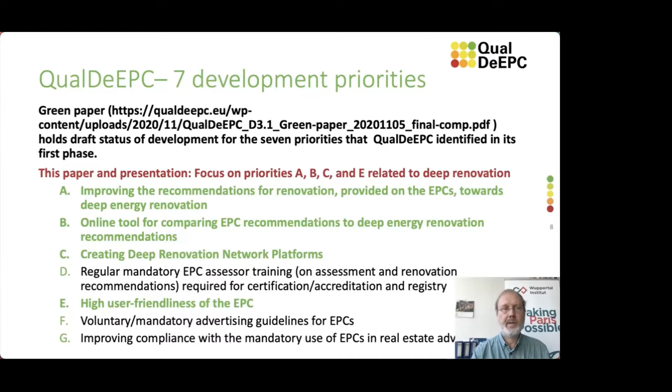In this green paper, we summarized the current situation in the partner countries for each of the 7 priorities, collected best practice examples, and then developed a proposal for each topic, which can be either a policy proposal or a tool or combining both. So these policy proposals are general proposals that could be adopted in any country in the EU. And some details may not be feasible in specific countries, or they may already exist. And so the next work package will develop the country-specific adaptations for the 7 countries included in our project.

So let me start with priority A, the recommendations for renovation. We found that currently the recommendations that are provided on the EPCs are usually oriented towards minimum legal requirements and often only include low-cost measures. So if, for instance, the renovation of the facade or the roof is not deemed cost-effective by the assessor, he or she may not recommend this at all. So we think this is also maybe a misinterpretation of cost-effective or cost-optimal.

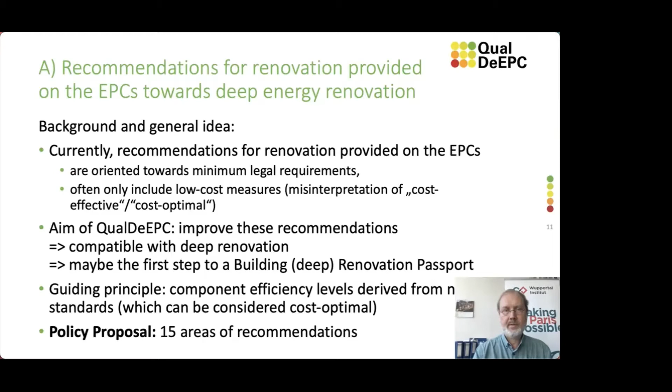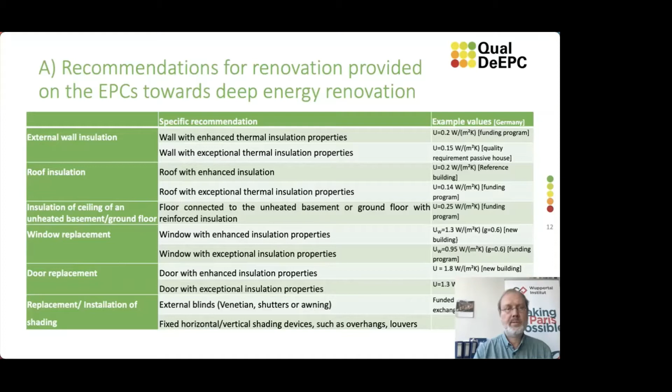And so we developed a policy proposal with 15 areas of recommendations. You can find them in the paper. They are concerning, of course, the building shell, with often 2 levels, good and very good insulation properties. Then they are concerning the heating, ventilation and air conditioning systems. And finally, several special aspects.

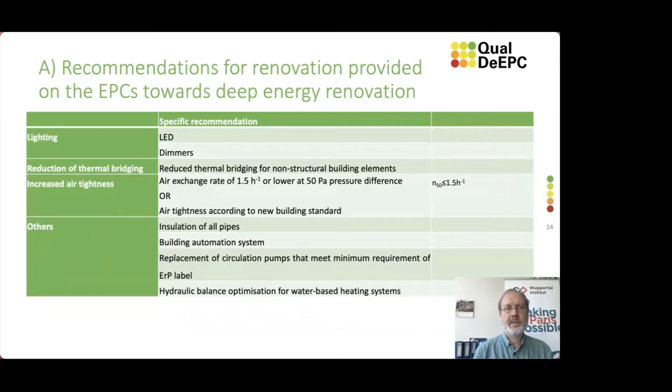The second priority is a tool, an online tool for obtaining first recommendations on deep energy renovation. It's based on an existing home energy check tool from Greece. There are several similar tools in many countries, but not in all countries already existing.

And the aim is to have a user-friendly user interface for building owners that allows them to understand which recommendations could be interesting for their building, so to discuss them with the EPC assessor. Or if they already have an EPC with maybe only a few recommendations, to get a second opinion: are these good or what else could be done?

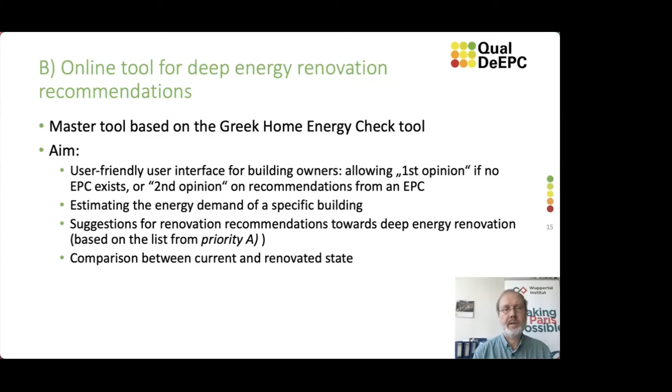And based on some inputs for the building, this tool will allow to estimate the current energy efficiency, to select renovation options, or it will provide some recommendations to the user, and it will calculate an estimate for the energy efficiency and savings in case of renovation. But of course, this is only a first impression of what could be cost effective and could be done. So the tool will in any case recommend to obtain an energy audit to validate the energy demand and these recommendations.

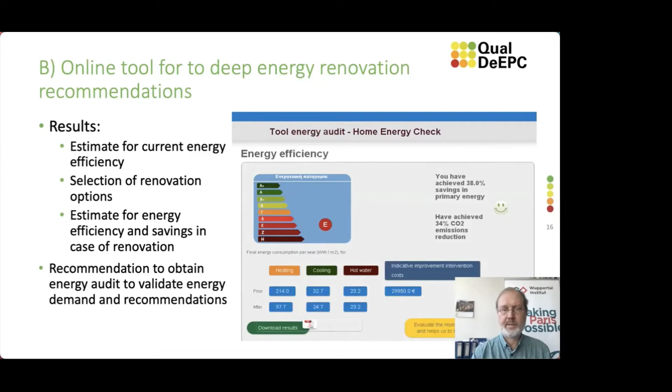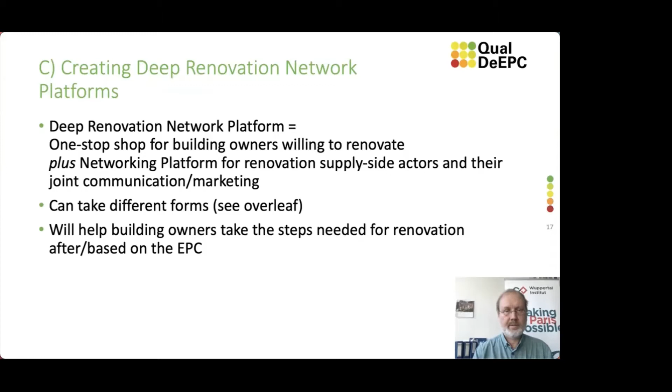Then the tool will also be linked and included into what we call deep renovation network platforms, which is another tool. It is meant to be the concept of a one-stop shop, which is often discussed these days and tested for building owners willing to renovate, plus also a networking platform for the supply side actors in the renovation business, for joint communication and marketing, or also for training these supply side actors. It can take different forms, and it will help building owners to take the steps needed for renovation after they have an EPC, and best also based on the information in the EPC.

So these deep renovation network platforms can either be an online platform or a local or regional physical hub, or also a combination of both. And they can provide information only, or they can guide and coach the building owner through the implementation, or they can even help organize the implementation itself, including the finance, for example. We've defined a basic version, which is an online information platform, whereas the extended versions can be all other types.

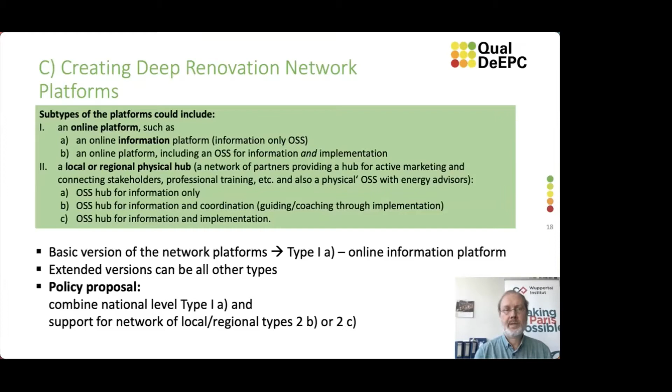And we've also prepared a policy proposal, which is for national governments to combine an online information platform at the national level, and financial and technical support for a network of local or regional physical hubs that also offer guidance or coaching, or even support with the actual implementation.

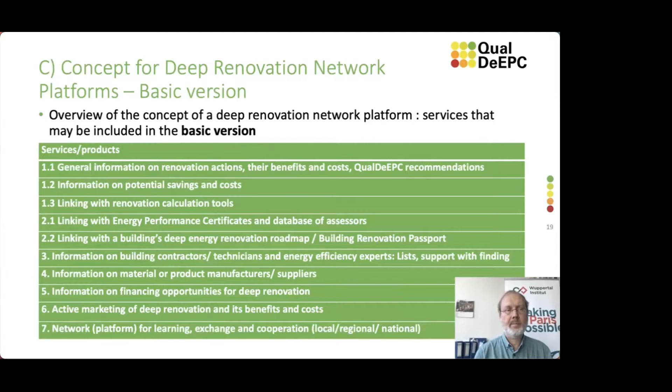The basic version, as I said, is mostly information on renovation actions, their benefits and costs, the link to the renovation calculation tool, and of course to energy performance certificates in explaining these. Also possibly with a building renovation passport, support with finding contractors or materials, information on financing opportunities, but also for the supply side actors, active marketing of deep renovation, and a networking platform for them for learning, exchange, and cooperation.

The extended version could also include capacity building and training, or the step-by-step guidance and coaching for renovation projects, monitoring the implementation of renovation projects, operating a physical network hub and information center, maybe carrying out renovation projects on behalf of the building owners, maybe initiating and coordinating demonstration projects, or aggregation of building renovation projects.

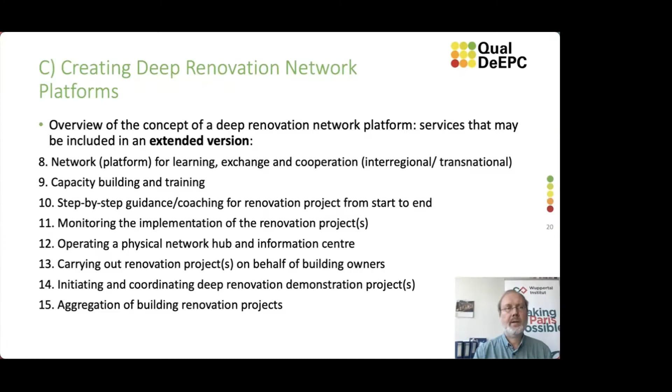Then finally, the high user friendliness of the EPC, which concerns the EPC form or template itself. And our objective is to make these EPCs more useful as a first step towards deep energy renovation, but also for the buying and rental market of buildings, of course, which is the second objective of EPCs. We found that in many countries, the EPC forms implement the basic EPBD requirements, but asked ourselves, is this what building owners or potential buyers and tenants need?

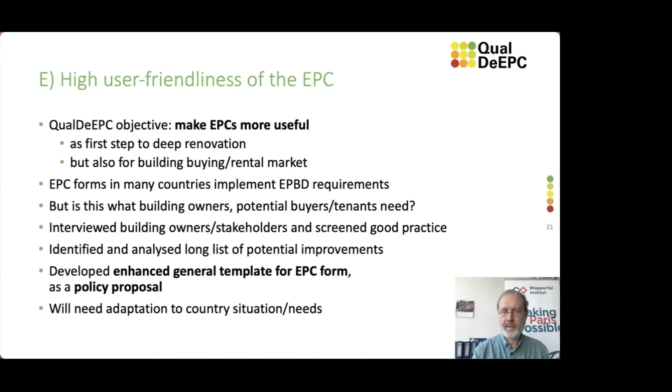So we interviewed building owners and stakeholders and screened good practice, and identified and analyzed a long list of potential improvements, and then developed an enhanced general template for the EPC form as a policy proposal, which has a standard design of 4 pages, room for adjustments according to national requirements, of course has the basic building data, but then not only the current energy classification and data required by the EPBD, but also, as you see on the right column, a new classification and energy performance.

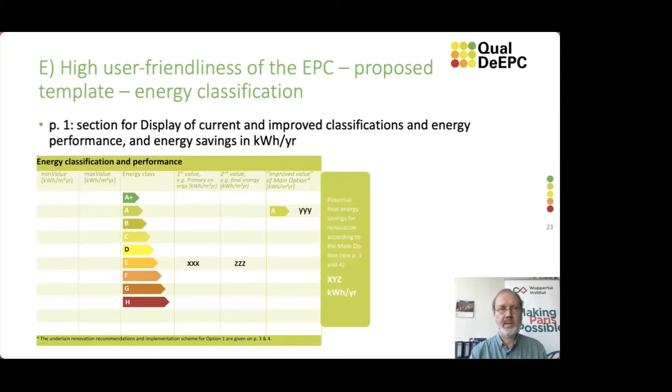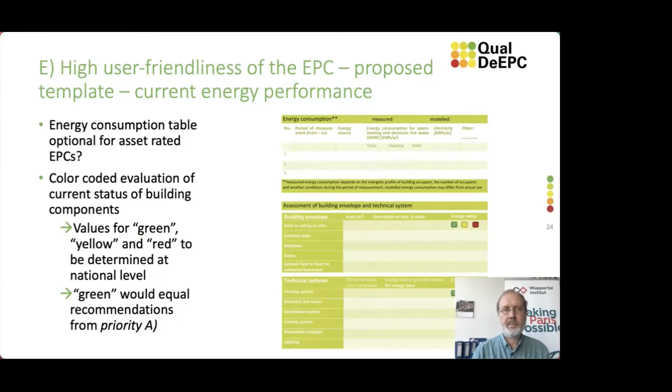And in addition, not only per square meter, but also for the whole building or dwelling in kilowatt hours per year, the savings that can be made, because this is more informative for users. Then we also have a scheme of classifying with a traffic light scheme the current efficiency of the building components and also of the recommendations, which of course should then be green and be based on our priority A, our improved recommendations. And the assessor can select a combination as the main option for which the savings will be given on page 1.

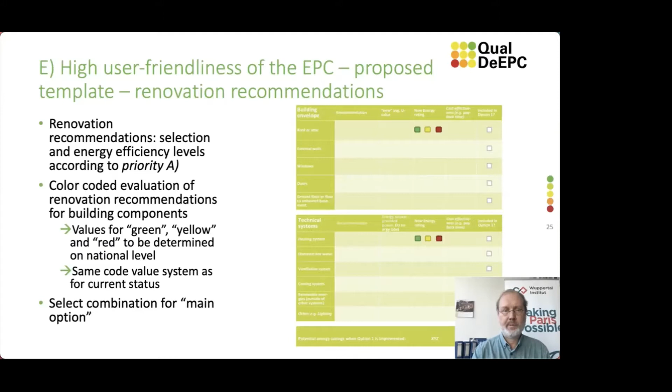And the fourth page also has a description of useful combinations and a stepwise implementation of the recommendations of the main option to be a first step towards a building renovation passport, and a link in the future to a deep renovation network platform at national scale.

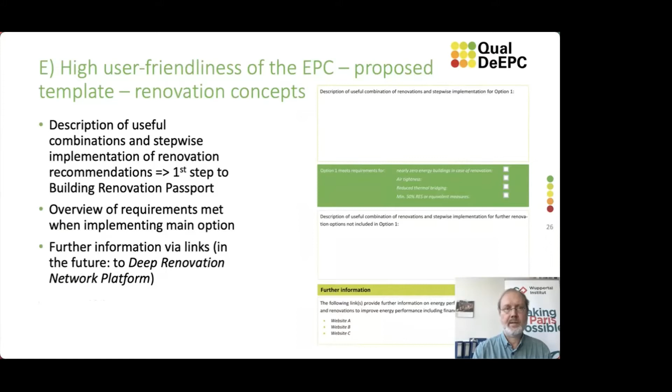We had a second round of national workshops and an EU workshop, which mostly welcomed these draft proposals and tools, but also gave us some suggestions for improvement. For instance, that we need to guide better on when to recommend which action on the EPCs, based on whether renovation is planned anyway, or what is cost effective using incentive programs. And also not only include energy data, but also CO2 emissions and potential CO2 and possibly cost savings on the template. We are currently testing the template in around 100 buildings, including non-residential. And this also confirmed the findings.

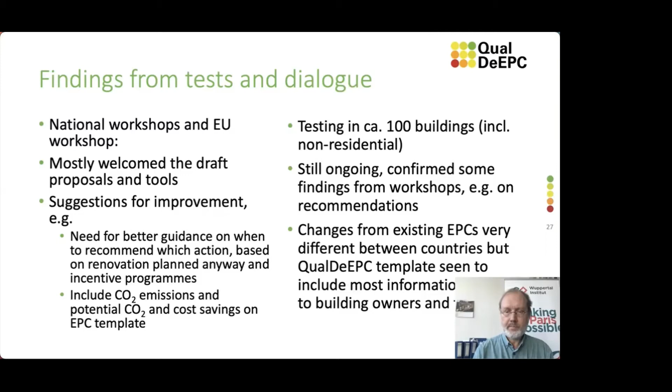So discussing, we find that EPCs in their recommendations do have potential for deep energy renovation if they are consistent with deep energy renovation standards, are provided in a user-friendly way, and connected to further energy advice and financial and technical support. It would be better to require building renovation passports, but when will they be introduced? EPCs could be the first step towards it. The white paper will update the proposals and concepts, and then we will adapt to the national situation and develop further products. Thank you for your attention.

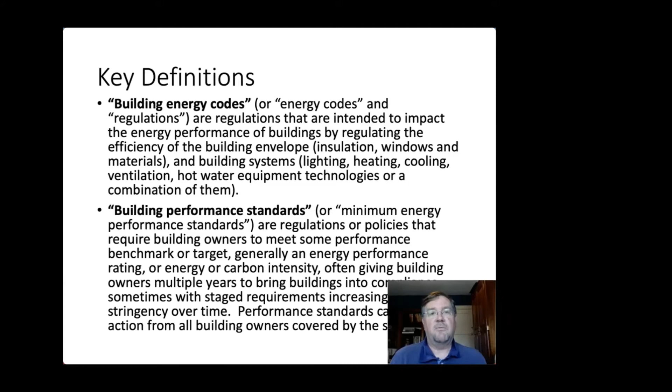I'm going to show several tables now that are extracted directly from the paper. Some of these have a lot of words on that I'm not going to try to get into in much detail, but wanted to let you know the kind of information that is included in the paper. This is a summary of some building performance standards in a number of the leading jurisdictions.

And when our paper was going through the peer review process, the reviewers suggested that because building performance standards are a newer type of policy, that we include some summary of the requirements and the types of performance requirements that are in place in some of the leading jurisdictions. You'll see more on this in the paper, and then you'll also see several references that have much more detail in the paper as well.

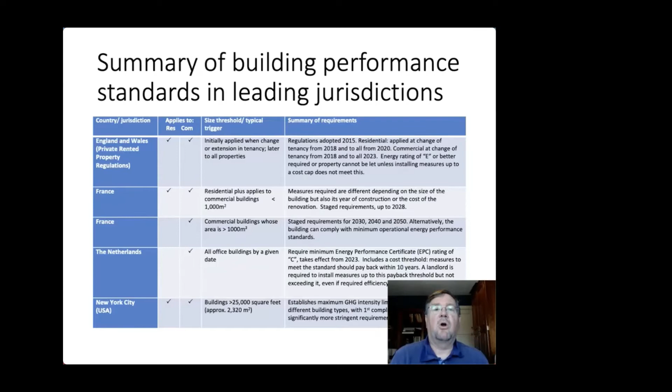But I think, as you see here, they apply to different types of buildings. There's often a size threshold, but not always. And then you can see there are also stage requirements that will take place and change over time, often tied to some sort of energy performance certificate or rating level. But in the case of New York City and also Tokyo, which is described in the paper, it's a maximum greenhouse gas or carbon intensity for the building.

Next, what are kind of the basis of the requirements and how do they differ? As I'd said before, energy codes are generally developed for new construction, though then some of those new construction requirements are applied to substantial renovation or alteration projects to existing buildings, whereas performance standards are based on some sort of threshold of building energy or carbon performance, generally, as I said, with a performance rating or some sort of energy or carbon intensity.

The big difference, and part of why there's so much interest in performance standards now, is this trigger for requirement, that a code generally only applies for an existing building when you're doing some sort of significant renovation, refurbishment, or remodeling of an existing building. And often then that renovation needs to be exceeding a certain portion of the building floor area or value. So there aren't as many times when that would be triggered.

A performance standard is generally applied more widely to a wide set of buildings, perhaps on change of ownership or tenancy, but then you need to, at some point, either by a date or by that change in ownership or tenancy, bring the performance up to some prescribed level that again can change over time.

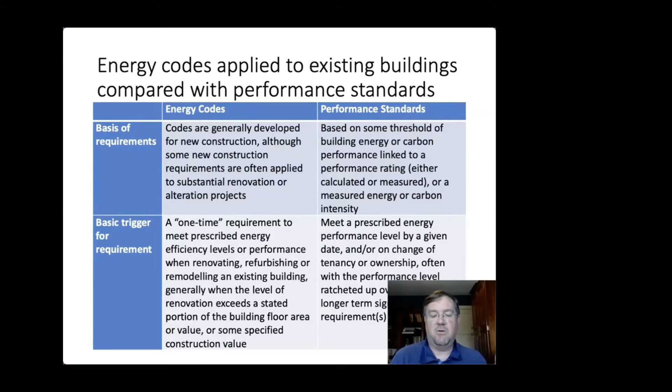What are some of the main differences? And I think, as I alluded to before, with energy codes, with building renovation as the trigger, only a small percentage, generally in any given year, face those types of requirements. So we're only hitting a pretty small fraction of the existing building market in any given economy or jurisdiction, whereas performance standards really get into potentially a much broader set of buildings.

But that comes with issues. A big one of the implementation issues is that with this new type of regulation, many potentially regulated buildings would not be otherwise subject to ongoing maintenance or other building requirements after having met some sort of initial occupancy certificate. So there are some implementation issues involved. Some of the other pieces, and again, we have more detail about this in the paper, in terms of enforcement and compliance, in many cases for a code, the building control officials may not be notified.

It may or may not actually, even if the building is kind of by regulation or by law required, in actual implementation or practice, the compliance may not be enforced as directly.

One of the pieces that is an issue with performance standards and why sometimes they're phased in with certain building types or building sizes early on is that this can require a lot of new capacity, not only for regulators, but for building rating systems, building rating professionals, as well as the various contractors and building energy trades that are required to make the upgrades that will bring a building up to the performance level.

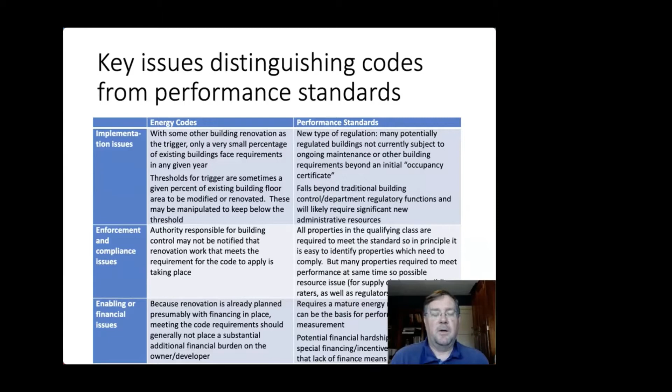Really, I think when we tried to summarize a lot of what we learned through this process, and again, this is an ongoing project to support the IEA Building Energy Codes Working Group, a few key pieces that we saw are, in terms of benefits, energy codes are widely understood in most of the OECD and even some emerging economy countries, though much more with application to new construction, not necessarily for existing buildings. In terms of enforcement, we find that sometimes energy codes are not the highest priority, that health and life safety issues take a higher priority.

Performance standards, I think the main benefit, as I've already said, is there is a way of triggering major energy improvement activity without other construction such as remodeling or renovation being the trigger. And part of this then is it should definitely drive much more significant volume of building energy improvement in the existing building stock. And the other major benefit that we see is this longer term glide path with staged changes and signals about requirements coming several years into the future that can be considered to have a pathway, maybe through some sort of roadmap or building passport that can allow building owners to do capital planning to get toward longer term improvements and meeting the deeper targets.

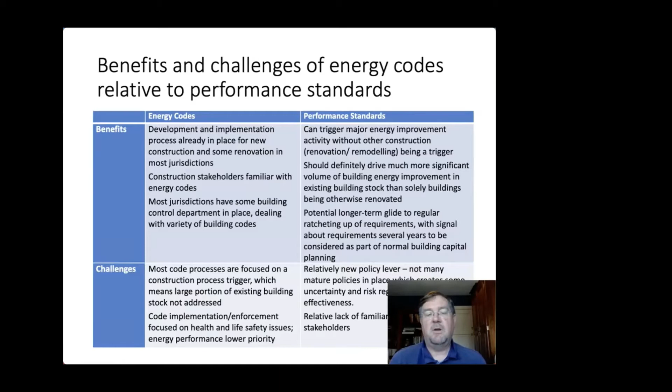The one negative, I would say, is it's a relatively new policy lever. There are not many mature policies in place. A lot of them are just taking effect now. So there's a ways to go before we will know what the real impacts are. And there can be a relative lack of familiarity by many industry stakeholders. And that kind of came through even through the review of this paper.

Our conclusions, again, this is somewhat repeating what I had in the previous table, but energy codes are a very mature regulatory policy in wide use. I will say there's significant variation we've found among different countries and even within countries. And in the full report that's forthcoming, we will also have some more detailed information about the triggers and thresholds that are applied within different states and localities in Australia when there's the same model national code in place.

Performance standards, again, somewhat repeating, but it's a newer policy tool without longer-term, widely evaluated experience, but potentially driving much more energy performance improvement in much larger numbers of buildings. These two policy types can be applied differently, or in some of the jurisdictions, they are being applied together to achieve significant savings in the very large existing building stock, and we see a lot of potential for that to improve and increase in the future.

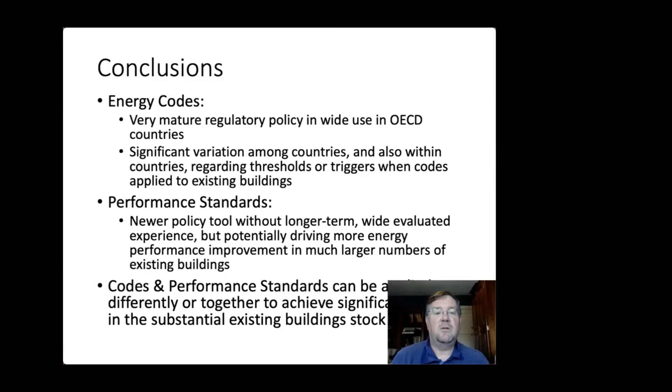Move on to questions now. I will briefly say that most of you probably know that there is currently an open consultation from the European Commission on potential changes to the Energy Performance of Buildings Directive, and there are some specific questions that the Commission staff have asked regarding minimum performance standards for existing buildings. I encourage you to read our paper and ideally to submit some comments to the Commission as well.

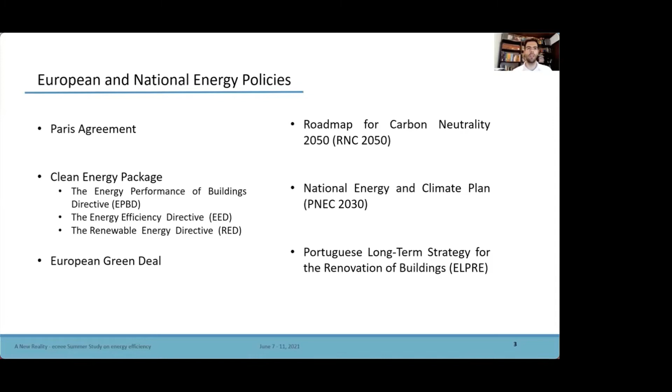About energy policies at the European level. In 2016, the Portuguese government committed to ensure the neutrality of its emissions by the end of 2050. The Clean Energy Package, a set of legislative actions on the energy performance of buildings, energy efficiency, and renewable energy. The European Green Deal, a set of initiatives aimed to make Europe climate neutral in 2050. At the national level, the Roadmap for Carbon Neutrality 2050, a long-term strategy for carbon neutrality of the Portuguese economy. The National Energy and Climate Plan 2030, and the long-term strategy for the renovation of the buildings.

The National Energy and Climate Plan sets the following energy and climate goals for 2030. Reduce greenhouse gas emissions by a minimum of 45%. Reduce primary energy consumption by 35%. Ensure 47% of renewable sources in gross final energy consumption. Ensure 20% of renewable sources in the transport sector, and achieve a target of 15% electricity interconnections capacity.

The Portuguese long-term strategy for the renovation of the buildings establishes the indicative objectives for the horizon of the decades 2030, 2040, and 2050. The indicative objectives are the following: renovated building area in the proportion of 363 million square meters for 2030, 635 million square meters for 2040, 747 million square meters for 2050.

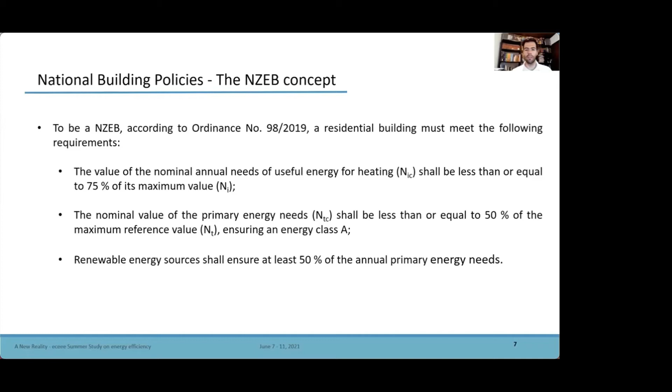To be an NZEB, according to Ordinance number 98/2019, a residential building must meet the following requirements. The value of the nominal annual needs of useful energy for heating shall be less than or equal to 75% of its maximum value. The nominal value of the primary energy needs shall be less than or equal to 50% of the maximum reference value, ensuring an energy class A. And renewable energy sources shall ensure at least 50% of the annual primary energy needs.

Regarding the state of the art of buildings in Portugal, the building sector is responsible for about 30% of energy consumption in Portugal. In 2019, about 5.97 million existing housing units contributed to energy consumption and to greenhouse gas emissions. Since the implementation of the energy certification system, around 1.4 million energy certificates have been issued, of which around 1.2 million are for residential buildings.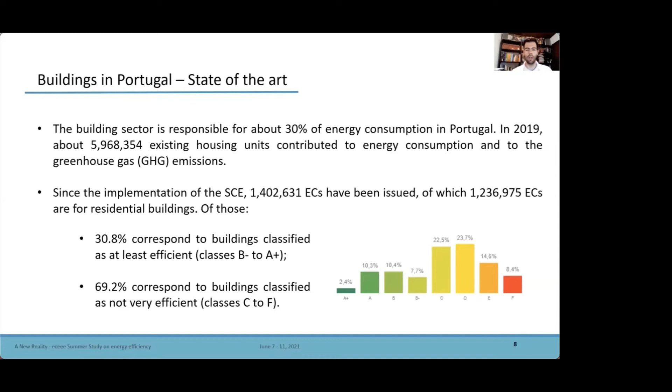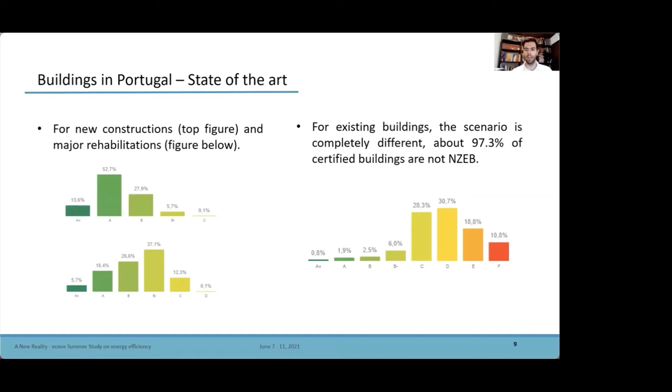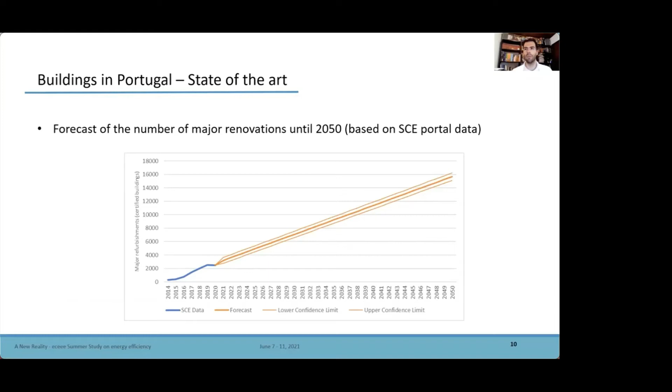About funding and support programs. The plan to promote efficiency in the consumption of energy aims to promote measures to improve efficiency in electricity consumption. According to the evaluation criteria of the measures of PPEC 2017 and 2018 edition, the residential segment presented higher values for the cost-benefit ratio in all aspects of evaluation, from the point of view of the plan, the consumer, and social, revealing that the energy efficiency measures implemented in the residential sector are extremely beneficial to the electricity sector, to the consumer, and to the environment.

Despite that, only around 3 million euros of the total available budget of 23 million euros was allocated to the residential segment. The program in support of more sustainable buildings aims to finance measures that promote rehabilitation, decarbonization, energy efficiency, water efficiency, and circular economy in buildings, aiming occupied residential buildings built prior to 2006.

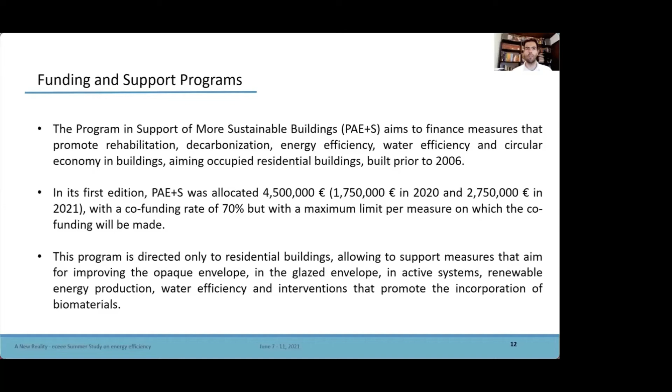The Recovery and Resilience Plan is a national application of the Portugal 2030 strategy and is based on three structuring dimensions: resilience, climate transition, and digital transition. Based on the climate transition theme, 620 million euros of investments are planned to promote energy efficiency in buildings. These investments will be divided into 300 million euros in energy efficiency in residential buildings, 250 million euros in energy efficiency in central public administration buildings, and 70 million euros in energy efficiency in service buildings. The Recovery and Resilience Plan should leverage the implementation of the long-term strategy for the renovation of the buildings in Portugal.

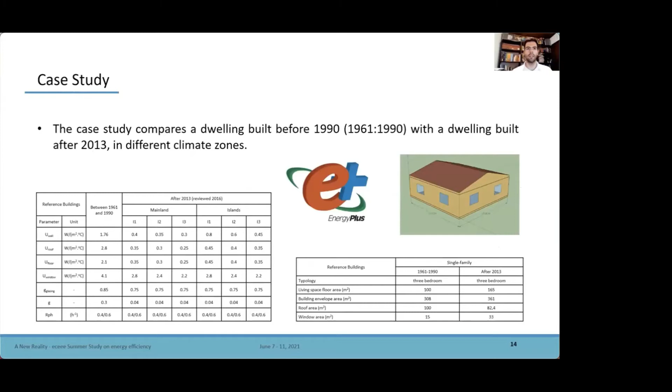Moving to the case study on energy performance of buildings. The case study compares a dwelling built before 1990 with a dwelling built after 2013 in different climate zones. These are two of the reference buildings in Portugal defined according to the EPBD recast and Delegated Regulation 244. With the data collected, we performed dynamic thermal simulation using EnergyPlus software to obtain the energy needs in kilowatt-hour per square meter per year for the reference buildings in the 7 climate zones.

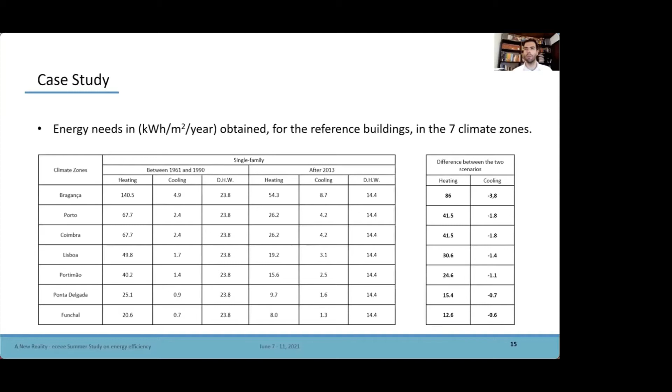The table on the right shows the potential of energy savings when comparing an existing building constructed in an era before the existence of legislation with a new building constructed nowadays, meeting the minimum requirements imposed by legislation. This energy savings was obtained only with measures improving the building envelope, thermal insulation on walls, roofs and floor, and with new windows. This work allowed to conclude that the Portuguese housing stock is too old and was mostly built prior to the emergence of legislation on thermal requirements, so the potential for improvement is huge.

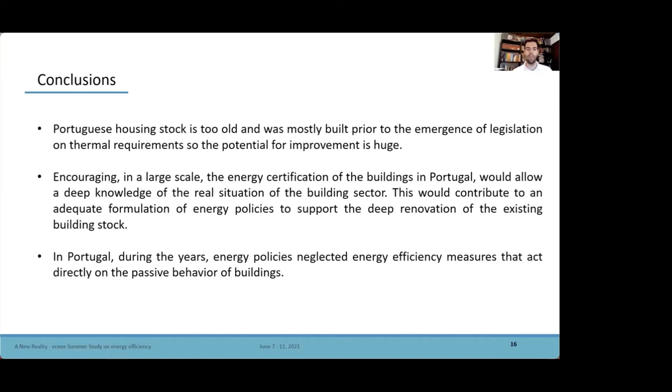Encouraging on a large scale the energy certification of the buildings in Portugal would allow a deep knowledge of the real situation of the building sector. This would contribute to an adequate formulation of energy policies to support the deep renovation of the existing building stock. In Portugal, over the years, energy policies neglected energy efficiency measures that act directly on the passive behavior of buildings. The simulation results make evident the potential energy savings that can be obtained through the implementation of measures at the building envelope level, comparing a building constructed in an era before the existence of legislation with a building constructed today, meeting the minimum requirements imposed by legislation.

In Portugal, there are about 157,000 nZEBs, corresponding to about 2.63% of the housing stock. The amount of nZEBs was achieved with the contribution of new buildings, major refurbishments, and some existing buildings. For Portugal to meet the objectives proposed in the long-term strategy for the renovation of the buildings, effective measures targeting the existing buildings are needed. This can only be obtained with more and substantial incentives, policies, and also more focused ones.

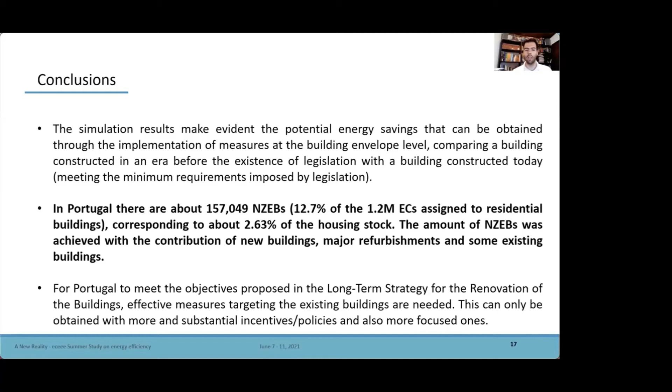Luis, thank you very much for this contribution and your presentation. I have a question. I think you worked out quite well that the majority of the buildings is not NZEB at all in Portugal. So I think that's quite similar to many European member states, and that more efforts are needed to increase this number significantly. From my understanding, what I learned from your presentation is that the main answer so far from the Portuguese government is financial support programs.

So my question is, because you also suggested to improve the information by better EPCs, for instance, do you think that financial support plus better information alone is sufficient? Or do you see that maybe combining financial support plus also some more regulations, like for instance minimum energy performance standards, as Adam introduced in his presentation, could be a way to increase the number of NZEBs in Portugal?

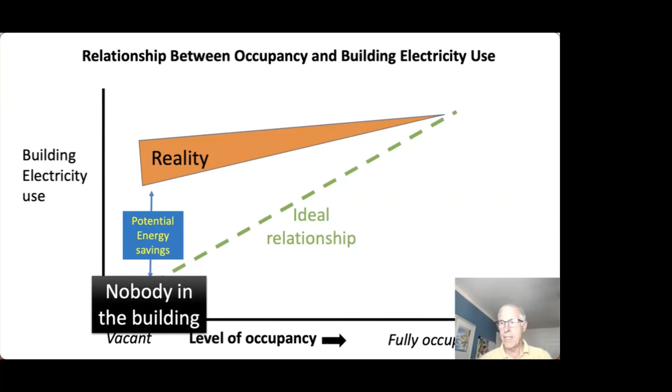Now, in this presentation, I'm going to focus on the extreme situation, that is when nobody is in the building. In other words, the building is vacant. This may be for an hour, a week, a month, or even a pandemic. You might ask, what is responsible for this high electricity consumption when nobody is in the building? We have conducted many audits, and here is a partial list.

This is a challenging list of equipment because their energy consumptions range from large to tiny. There is also no entirely satisfactory name for them. We use the term MELs, miscellaneous electrical loads, because it seems to accurately capture the whole universe of intended products. But mostly because this acronym, MELs, sounds pleasant to the ear.

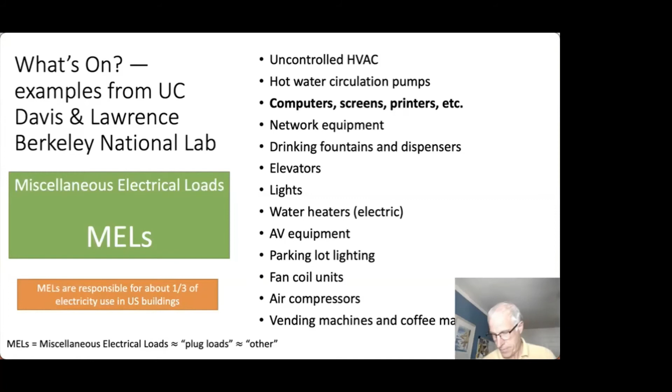Standby power use is one component of MELs energy use, but many of these devices are actually operating in their normal modes because they don't know that nobody is present. In the future, it will be much more difficult to think of buildings as either occupied or unoccupied. Instead, we need to treat occupancy more like a continuum. And here are three potential causes for variable occupancy.

The pandemic caused enormous changes in building occupancy, but less so in energy consumption. One survey of office buildings, admittedly a special case and a special segment, found that energy use fell on average less than 30%, even though the buildings were mostly empty.

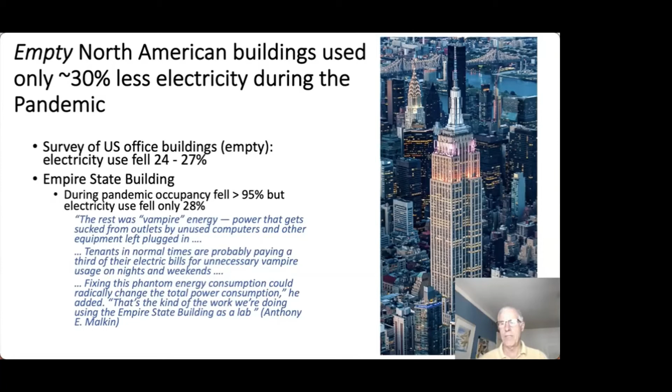A more detailed study of the Empire State Building in New York City, which is an iconic office building, found only a 28% reduction in electricity consumption, even though 95% of the normal occupants were working at home. This electricity use did not include space heating, cooling, or lighting because that was supplied centrally. It was electricity used by the tenants for equipment and appliances. More about that later.

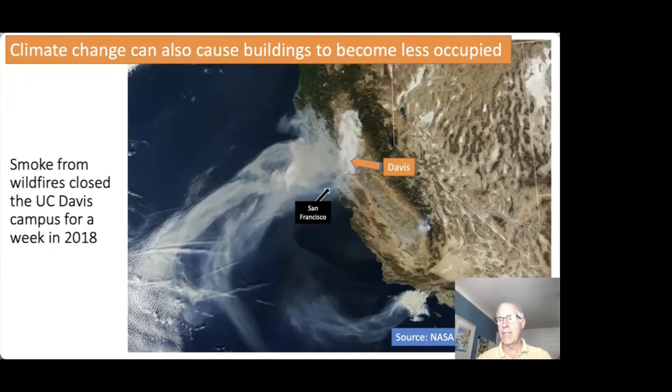Climate change can also cause buildings to become less occupied. One might not ordinarily think of climate change affecting building occupancy, but it has happened in California several times in the past few years, when smoke from nearby wildfires covered the region. The air quality was the worst in the world for at least a week, and our campus was closed during that time.

We're pretty certain that new work practices may result in reduced occupancy too. Zoom, Teams, Skype and other platforms have reduced the need for physical presence in the workplace. Many companies are already reconfiguring their offices in recognition of the projected variable occupancy patterns.

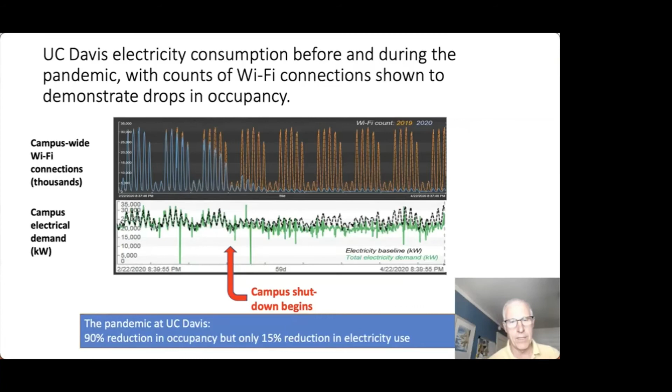That situation was the reason for us to embark on a case study of UC Davis buildings. In the first step, we examined the electricity consumption of different buildings while in normal occupied mode, and then compared it to the lowest consumption recorded. Only one building used less than half of its peak electricity when it was unoccupied. Of course, some of the buildings were laboratories and would be expected to have high continuous electricity consumption caused by the ventilation, refrigeration, and other equipment in those laboratories. From this list, we selected one building for more detailed examination, called Giedt Hall.

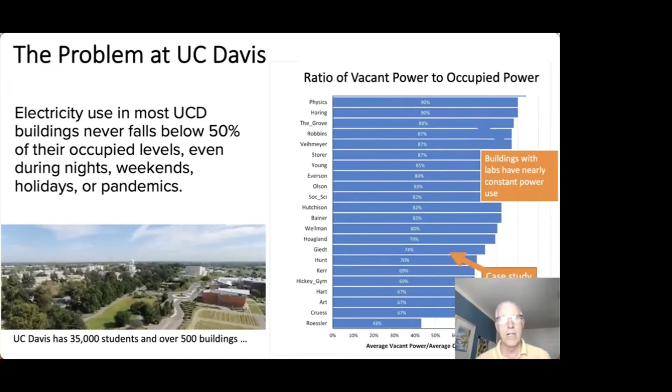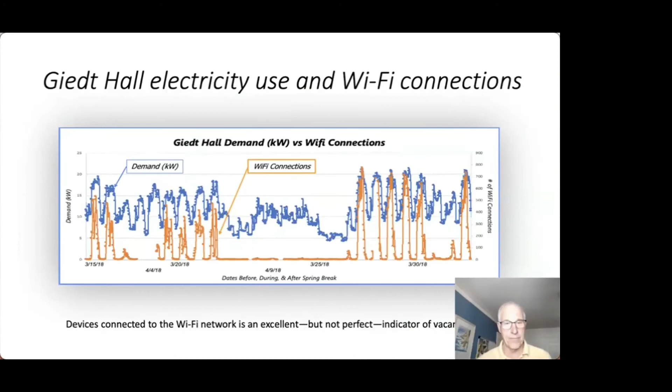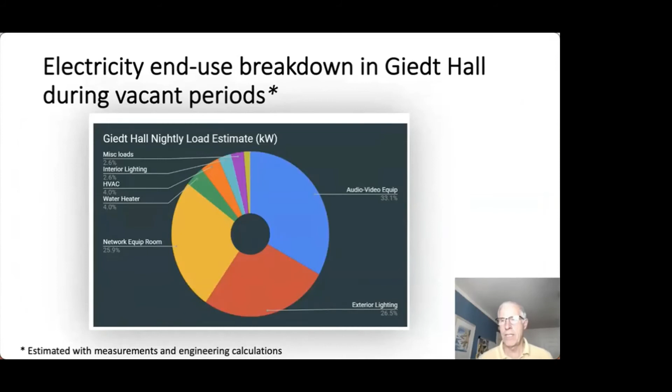Even more surprising were the causes of the electricity use in the unoccupied building. The audio-video equipment was responsible for about a third. The network equipment room followed closely behind. Now, keep in mind that nobody was in the building using either the audio-video equipment or the networks.

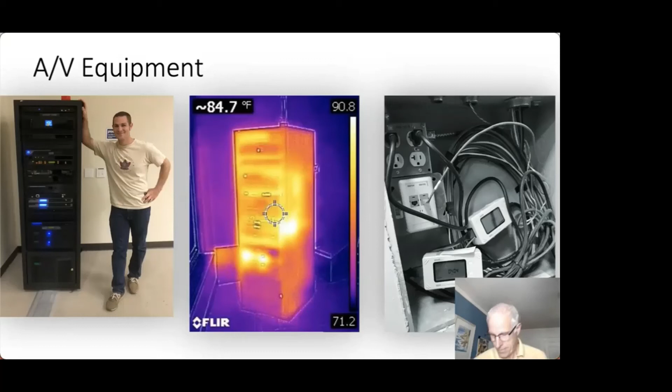This discovery prompted a closer study of audio-video equipment energy use at UC Davis. We employed several techniques to find which devices were hot or energized. In some cases, we had to use an infrared camera to identify the highest consuming components because the campus IT department would not let us switch them off or unplug them. But the IT department also helped us measure electricity use of some racks.

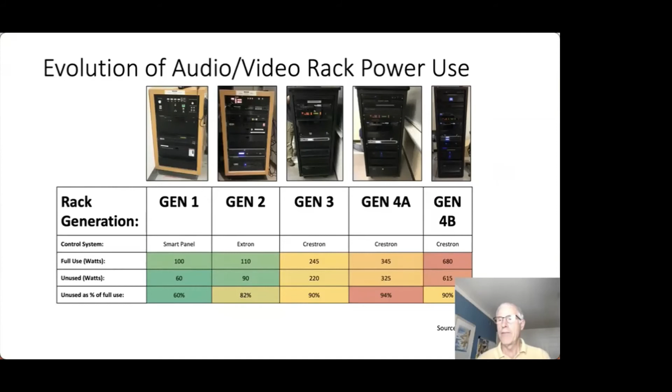One of the unexpected findings was that the newer racks used much more electricity than older racks, both on and off. For example, the Gen 1 unit drew 100 watts in operation and 60 watts in idle. The new models, the Gen 4B, for example, drew 680 watts while operating and 615 watts while in idle. The latest audio-video racks provide many new and valuable services. However, improved energy efficiency is not one of them.

These investigations led us to develop a new energy conservation strategy, namely, focus on the extreme case of zero occupancy. We think that strategy makes sense for campus buildings and probably many other buildings because, first, we can substantially cut back on the level of services. That is, no hot water, no chilled drinking water, some electronics switched off, etc.

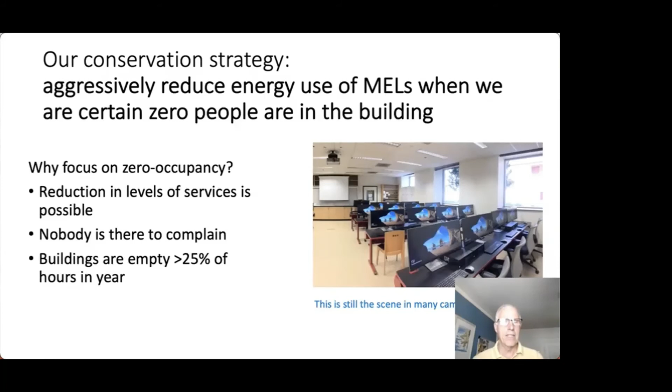Second, nobody's in the building to complain. That's an important issue. And third, a vacant situation persists for many hours in a typical year. So the potential for significant annual savings is large. You might be skeptical about the opportunities for saving energy when nobody is in the building. Here's a partial list of the measures we are considering.

This is a diverse list, but that's the nature of miscellaneous loads and why it's so hard to develop a strategy to reduce them. The middle column describes the modifications that we envision are needed to achieve those savings. In practice, we are creating a new vacancy mode. It's kind of like a sleep mode, but informed by external knowledge. That's different from common sleep modes that are simply based on elapsed time since last activity.

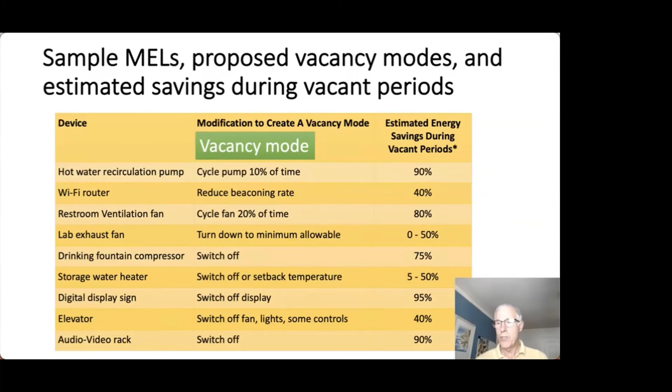It also includes many devices not presently having a sleep mode, such as uncontrolled ventilation fans and circulation pumps. Note the large savings fraction. That's because we can be much more aggressive in lowering or even switching off those services during the vacant periods. Now, after explaining the target and potential savings, I want to describe the technical approach.

Zero occupancy is a unique condition from both a sensing perspective and in terms of energy savings potential. We can't tap the potential savings unless we are absolutely confident that the building is empty. This requires 3 innovations to shift equipment into that vacancy mode described earlier. First, we need a means of inferring vacancy. The problem is that while we have occupancy sensors, there's no such thing as a vacancy sensor.

Instead, we need to infer vacancy from a group of sensors. This inference must be expressed in terms of a confidence or probability instead of the certainty of most occupancy sensors. A vacancy inference engine needs to continuously compute the probability of vacancy from the stream of sensors, schedules, and other sources. The second innovation is a vacancy signal that can be broadcast throughout the building. Actually, it's a vacancy confidence level rather than a simple yes/no.

Finally, the devices need to be modified to respond to the vacancy probability. I described the vacancy modes for some devices earlier. However, they also need logic to respond to a designated probability threshold value. The selected probability depends on several characteristics. One characteristic will be the device's latency. That is, its ability to quickly recover to normal service levels when somebody appears. Many electronics, such as digital wall displays, have short latency and can therefore switch to a vacancy mode even when there's only a relatively low confidence in the vacancy.

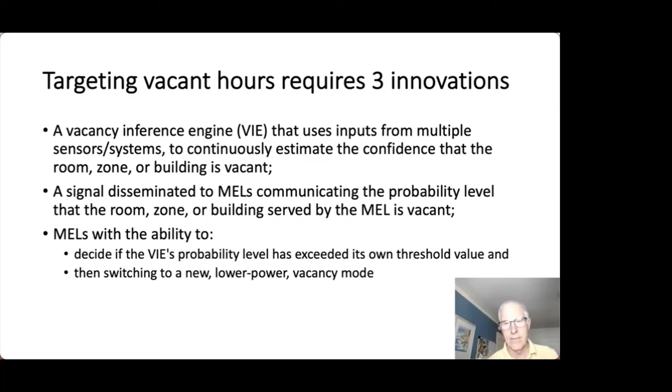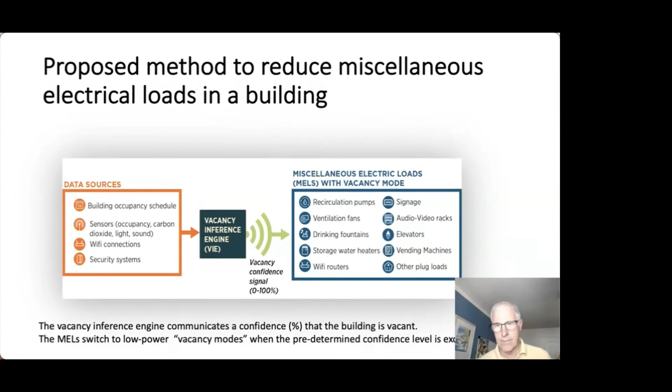This is the end of my talk. You don't need to understand the vacancy inference engine, sensor fusion, and vacancy modes. Instead, I hope that you will remember these points. First, vacant buildings are an untapped source of energy savings. Second, the category of miscellaneous electrical loads, MELs, is responsible for more and more electricity use in buildings. Finally, we need to develop techniques that enable buildings to become more occupancy responsive, and to do that in an automated way that saves energy.

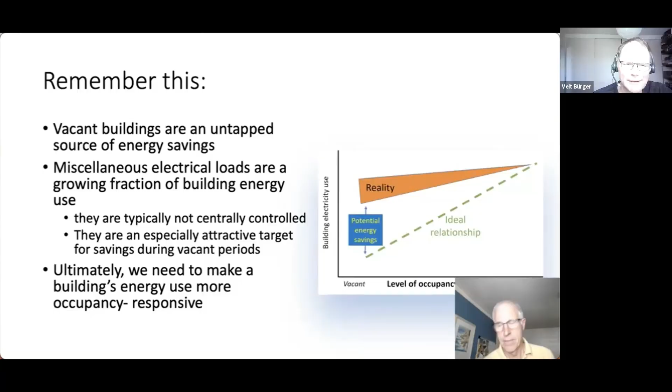I learned a lot, in particular that the energy saving potential in unoccupied buildings seems to be huge. My question would be, how would you translate your technical concepts and your technical ideas into policy? Would you like to see that integrated into a building code for new buildings, or would you like to include that somehow into an eco-design process, so appliance-oriented policy? And how would you deal with existing buildings?

Those are all very easy questions to ask and difficult questions to answer. I'll start with the equipment side of it first, because we can imagine a way in which a program such as Energy Star can include and create, in fact, a new kind of vacancy mode, so that in order to be eligible for an Energy Star certification, each device must have a vacancy mode. So that's a voluntary program that can begin fairly quickly.

And the advantage of what we were describing is that this whole procedure could be introduced incrementally. It does not require an entire ecosystem to start working. We can bring in just a few devices. We don't even necessarily need a complete communication system.